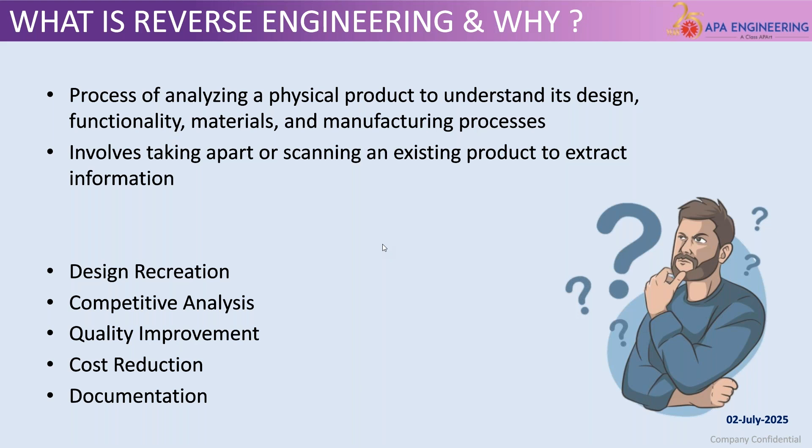Next is for cost reduction. Reverse engineering can also help in getting the CAD data, which is later used for understanding which alternate material can be used, or where material can be reduced to save cost, or how it can help in reducing manufacturing or tooling operations. The last but not least is basic documentation - you want to have some prints for your physical component. That's where reverse engineering comes into play.

Some industries where reverse engineering is extensively used are automotive, aerospace, electronics, manufacturing, and medical devices. Apart from medical devices, predominantly in all the other industries, reverse engineering is used basically for benchmarking, and for old service components like vintage cars, or even aircraft. Aircraft are up in the air and used for 10, 15, 20 years. So for some components, when it comes to servicing, you may not have the prints, or that company no longer exists, so you need to find another supplier. That's where reverse engineering helps in creating CAD models and drawings for that particular component. In manufacturing, it also helps in creating the tool, die, and fixtures for the components.

In medical devices, it is being used for creating implants and prosthetics. So if some person has a scar on his face or ear and you want to replicate or create a new one, you can scan his face - it's not harmful at all. The scanner is used to scan his face or any other body part, and it's not harmful to him. The 3D model then goes into 3D printing, and that's how it helps in medical devices.

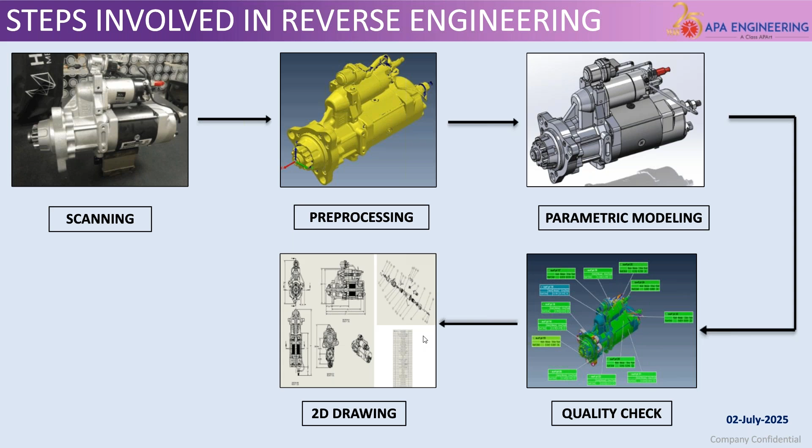Let's look at some tools and software used for reverse engineering. Traditional measuring instruments involve vernier calipers, screw gauge, micrometers. But the limitation is that it depends on the geometry of the component, so it's limited to very simple geometry and very minimum dimensions.

Nowadays we use CMMs and 3D scanners. Especially these 3D scanners - you have handheld ones, portable ones, varying across sizes from small to large, where even a small component can be measured, up to scanning an entire manufacturing unit. So the application is very vast.

Some of the reverse engineering software we use are Geomagic Design X and PolyWorks. For parametric modeling, we use software such as SolidWorks, CATIA, Autodesk products, and Creo. Any application or software the customer uses, the scan data can be aligned to that particular software.

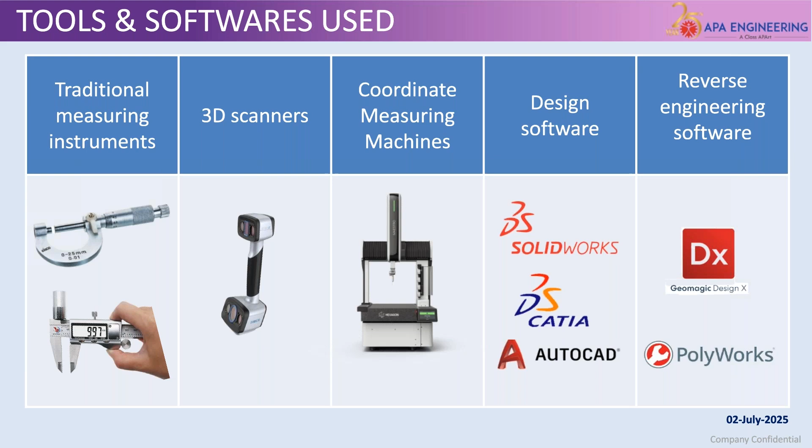Now we shall have a small demo where we see how reverse engineering works.

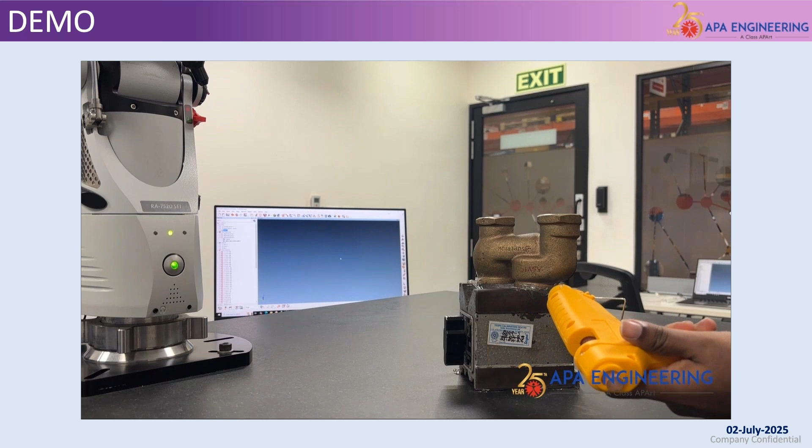In this case, we are actually scanning a brass valve. It has been cut into two halves so that the internal profile can be scanned.

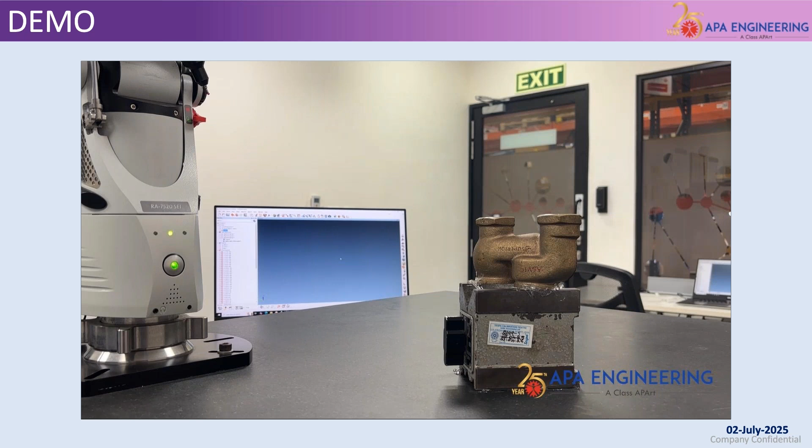The part is placed on a V block, and a glue gun is used to fix the part on the V block, since it's a brass component and not magnetic. If it's a magnetic component, this step can be avoided.

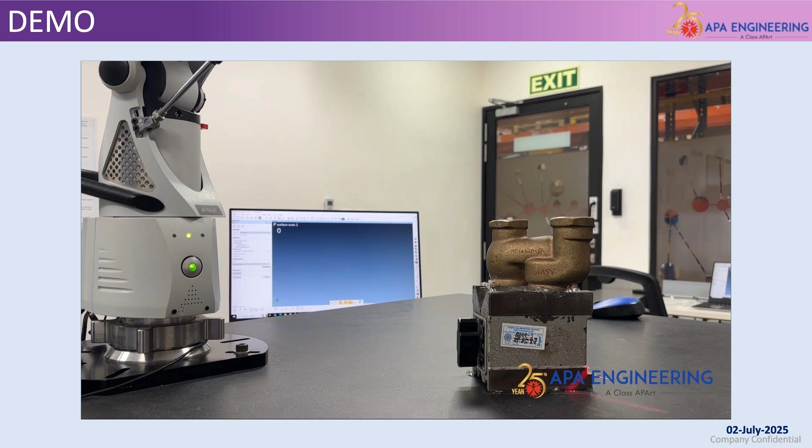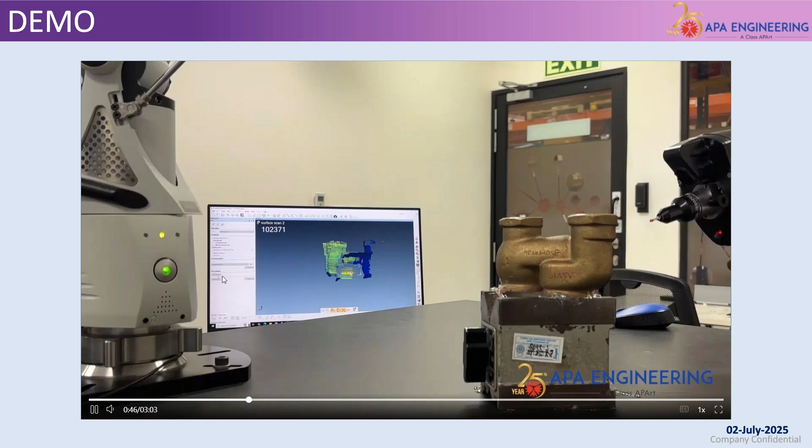After fixing the component, we create a clipping plane, in this case the top surface of the V block, so that when you scan, any data below the clipping plane will not be captured. As we scan, you can see on the screen the cloud points being generated. We make sure to capture all the data without leaving any gaps.

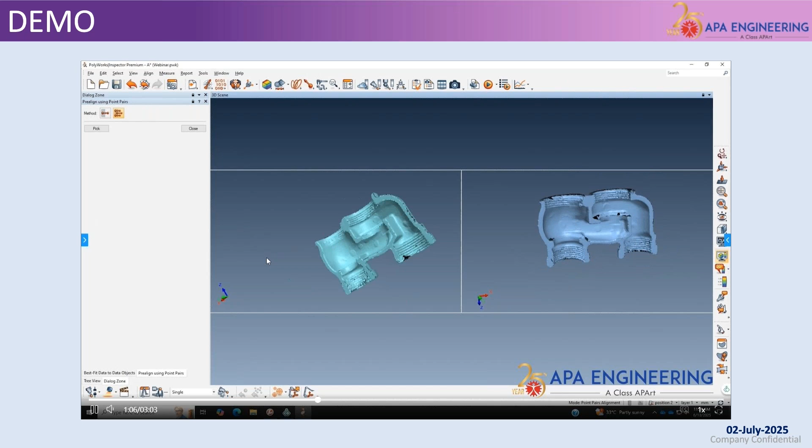In this case, we would be scanning in two settings. This is the first scan which you have seen. The surface which was in contact with the V block will not be scanned, so once this is completed, we flip the part, go through the same process, and scan the part once again.

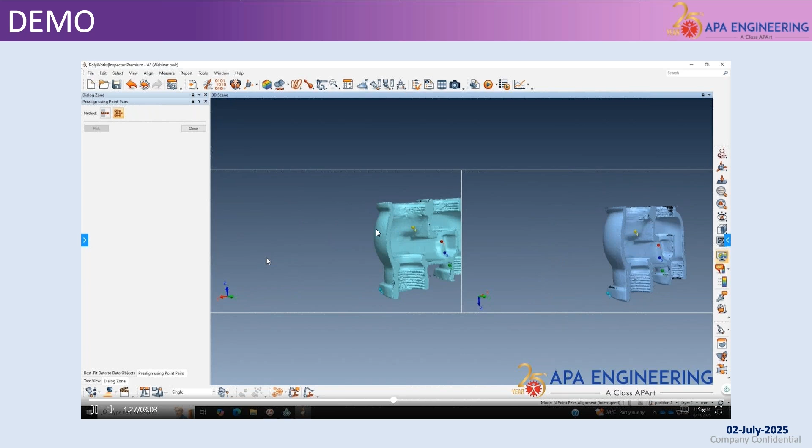Once that is completed, we align both the parts and try to merge them with common points, edges, features, whatever is available for reference, to create one complete scan data. Once this data is ready, you can see some edges protruding out, so the next step is to clean all this data. It's very easy, as you can use any normal eraser - it's as simple as that.

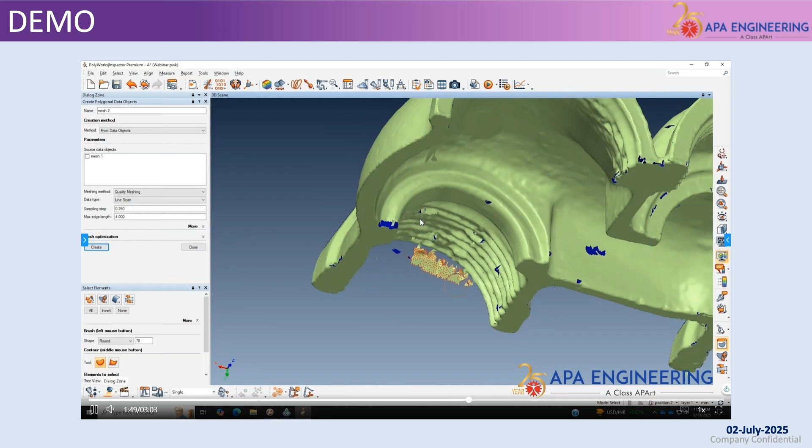So once the data is clear, we have to extract curves from this. Normally, based on the profile of the component, we extract based on the axis—it can be x-axis, y, or z. We need to ensure that all the features are covered in the planes.

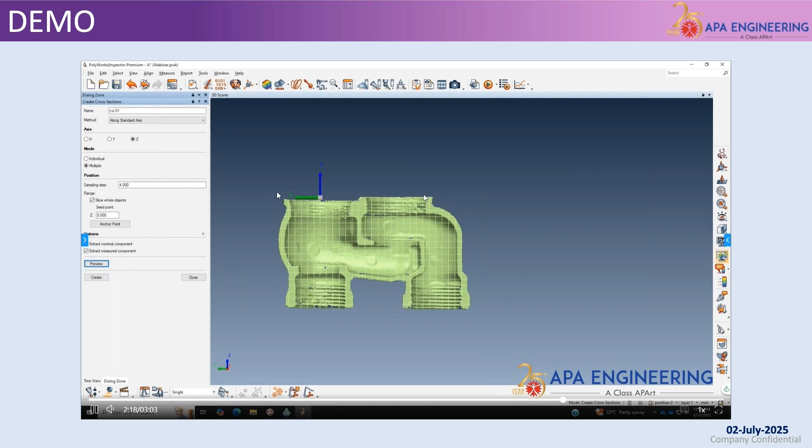So we need to appropriately give the number of planes. If the component is a very simple feature, doesn't have a lot of features in it, then we normally create bigger gaps between the planes, since it's going to be a continuous profile. But in a case like this valve, there are a lot of internal profiles and the contour keeps changing. So in such cases, we need more planes, so the distance between each plane is as minimum as possible.

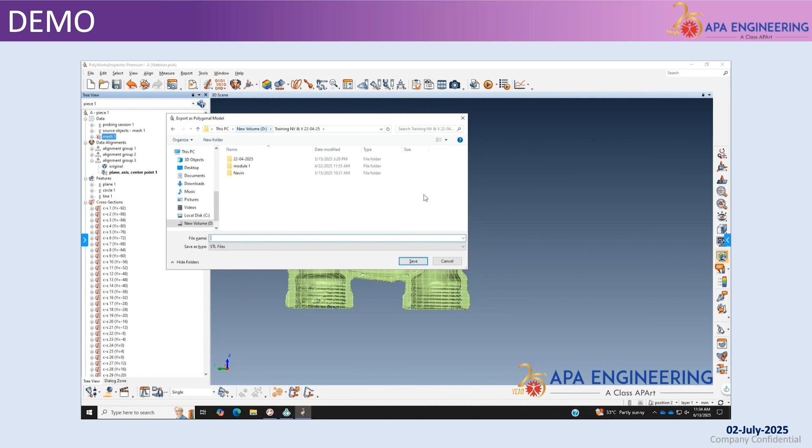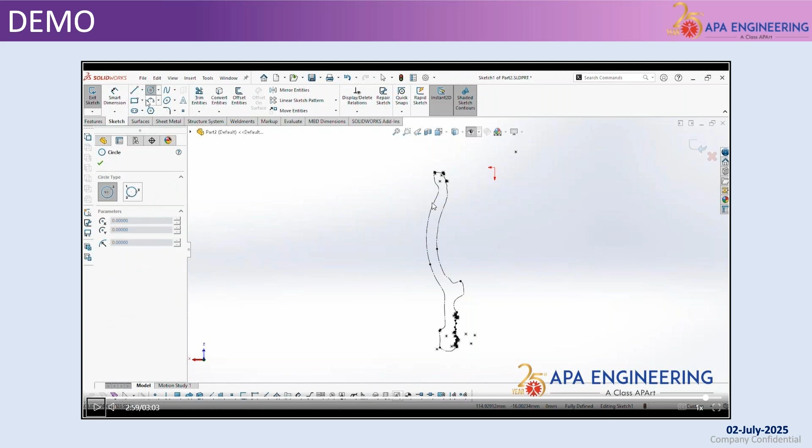So once the curves are generated, the next step is to export them. The curves will be saved as an IGS file, and the scan data will be saved as an STL file. The next step is to import them into any software you use—in this case, we are going to work in SolidWorks. As you can see, all the curves are imported in SolidWorks. The next step is to use the curves, identify which curve you want to start with, create sketches, and then work your way around to complete the 3D model.

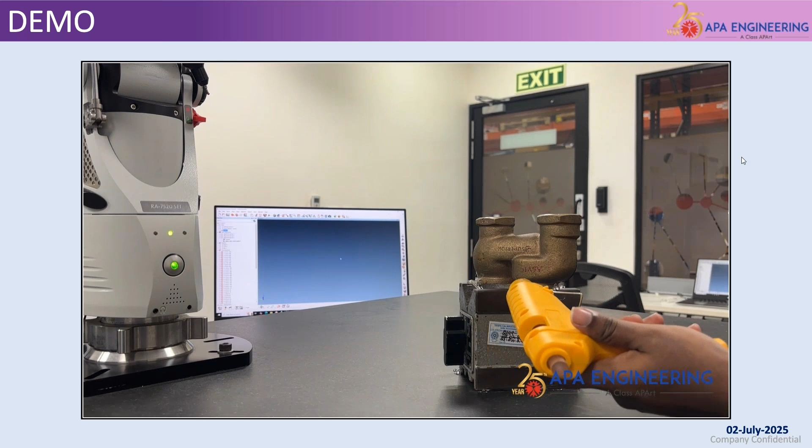So this completes the demo for reverse engineering. Next, we shall discuss some of the challenges we normally face during reverse engineering, and we'll have a look at how we can overcome them.

So one of the most common issues we see is getting a damaged part. The part can be either cracked, rusted, or worn out. If it's not a brand new component, this can create problems when you scan or measure the profile. If there's a broken edge, you may not get the right radius or the right position, the measurement for that particular feature. The holes may be worn out, resulting in bigger diameters.

In these cases, we first try to see if there's any symmetry in the component. If there's a better edge or better features in the other half, we can use that, or we need to compare it to some similar components so that we can reconstruct whatever is damaged.

Next is fit and function. Sometimes the parts we receive may be part of an assembly, so we are not sure what would be the mating dimensions of the profile of the mating component. In such cases, when we receive the sample, the tolerance applied for making it is a little difficult to identify.

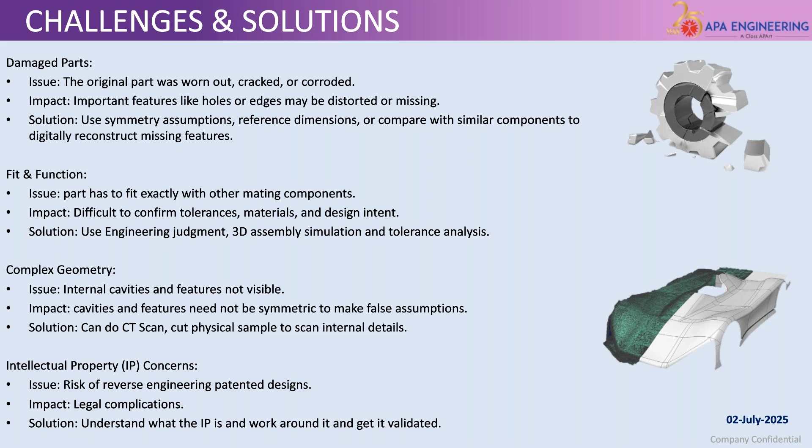So that's pretty much about reverse engineering. We went through the process behind it, where it is being used, and common challenges being faced in this. So now we are open to any questions if anybody has one.